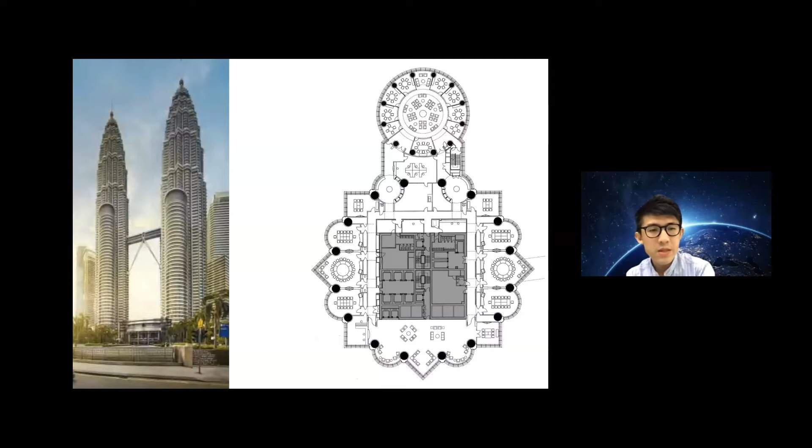And we are attracted to things like these, which are, to me, dangerous. We put up monuments to signify this sense of progress, this aspirational nature of humanity. But we forget that these remain containers merely for buildings that may be dysfunctional. In this case, KLCC is a great example of a building designed to look like something, but that operates poorly as an office. So as a practice, we're more interested in exploring these other spaces beyond what things look like, but perhaps how things feel like, how things work, and how things behave. That's the container, the filter, and also the lens with which we look at the world around us. We prefer to stay away from form.

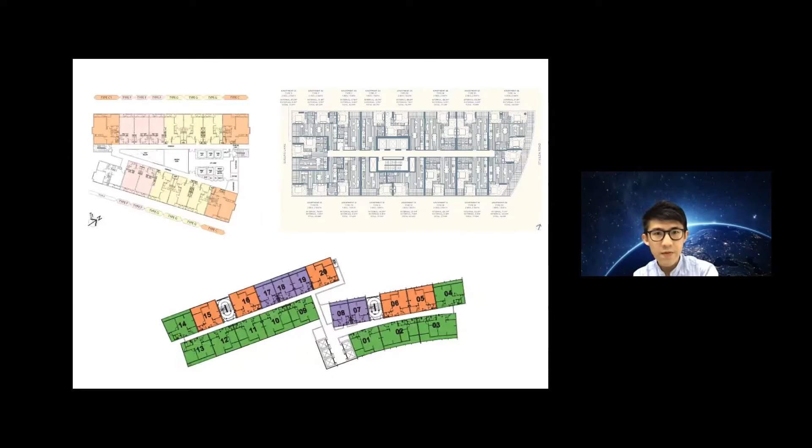We think more in conditions, environments, and situations. This is a very interesting slide that I've used in all my lectures. I won't tell you which one, but one of these buildings is in KL. The rest, one is in Melbourne, another in Milan.

But when you look at them, the floor plans all look the same. We feel we live in this kind of situation right now as humanity, where this is a representation of an apartment unit with a bit of living area, a bit of toilet, a bit of laundry, a bit of kitchen, a bit of bedroom or bedrooms. We're given bento boxes, and as architects, we design bento boxes, which is a bit of everything but actually quite boring. Even if you have this every day, it's not exciting. Even though we package it in different shapes, we are still creating bento boxes all around.

As a practice, we have queried that. We understand the drivers for these bento boxes: they are commercially lucrative, and developers love repetition. The problem is that the market, or people in general, are then educated into liking bento boxes. So we design bento floor plans, and further to that, towers of bento boxes, which are then replicated and distributed throughout our city. That is the position I feel we as a practice have sort of entered into.

I guess the question is, as architects, what kind of position do we take as practitioners, as thinkers? Do we perpetuate this form of thinking and the making of our cities, buildings, and built environments, or do we begin to take a more political stance so that our buildings become a position against or for a certain thing?

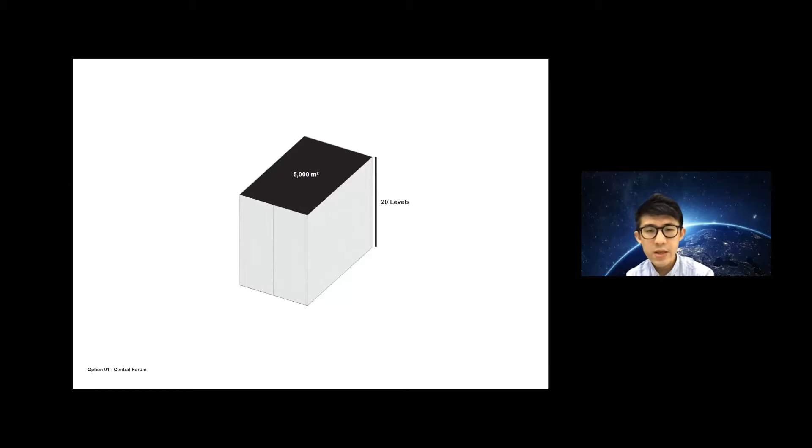This was a project we were invited in competition to work on in Port Moresby, Papua New Guinea, if you're familiar. It's a really strange place with very little context or built context. We were asked to put a really large office tower in the middle of nowhere. The client wanted a really large footprint and a fairly squat building. Our argument was that the deep footprint would make the building so deep that sunlight or natural light would not be able to get in.

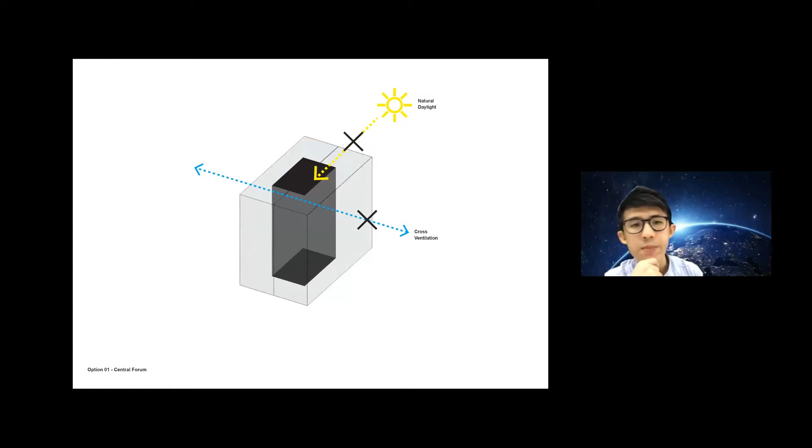So we proposed 2 buildings instead of 1, which they rejected. Further to that, we said, hey, why not bring the 2 together? Obviously it looks complicated, but it's a simple move. What this does is open up my first point, which is to open up new grounds. So our idea of a building sitting on a particular site or ground is then augmented in this situation where new ground planes are set up.

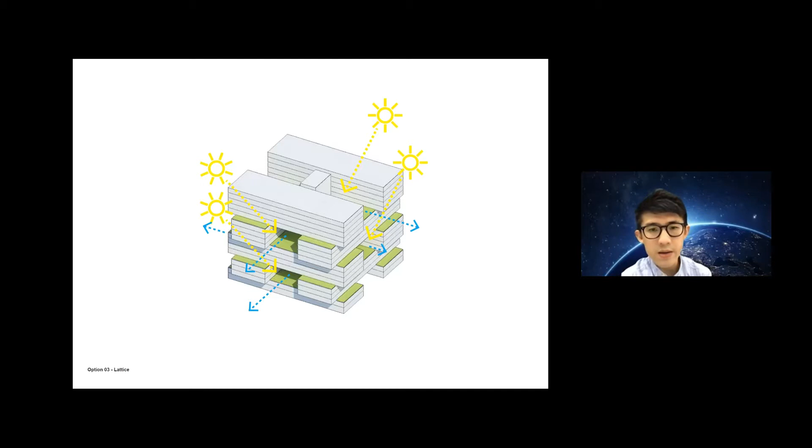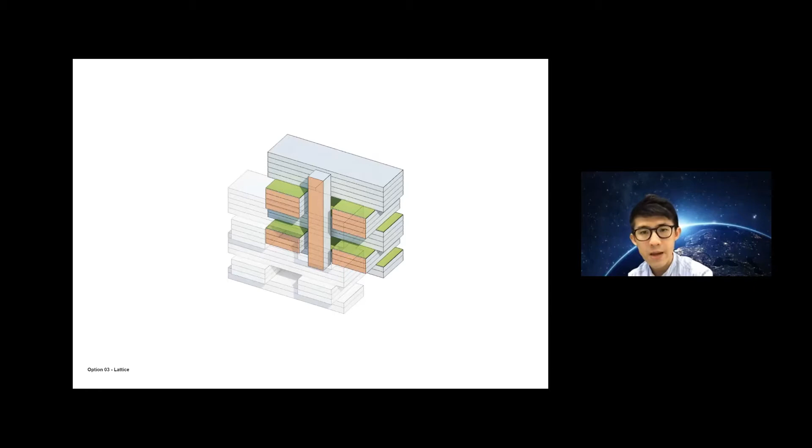Rather than thinking of this building as 20 stories, they are now stacks of 5 stories. What this does is set up a really interesting situation where the outdoors is immediately against the indoors. It also questions this idea of how we work - especially now, though this was done a good 5-6 years ago - in the era of the pandemic and post-pandemic, the question of how we work is front and center of the discourse. So this proposes another way of thinking where the building is now a community through the way it's stacked.

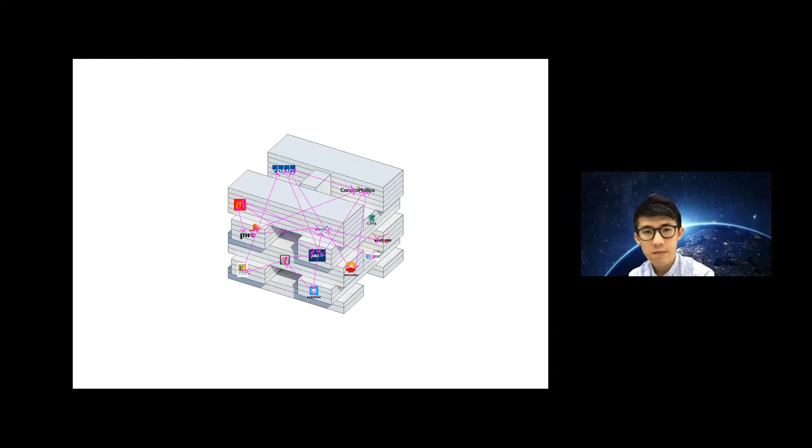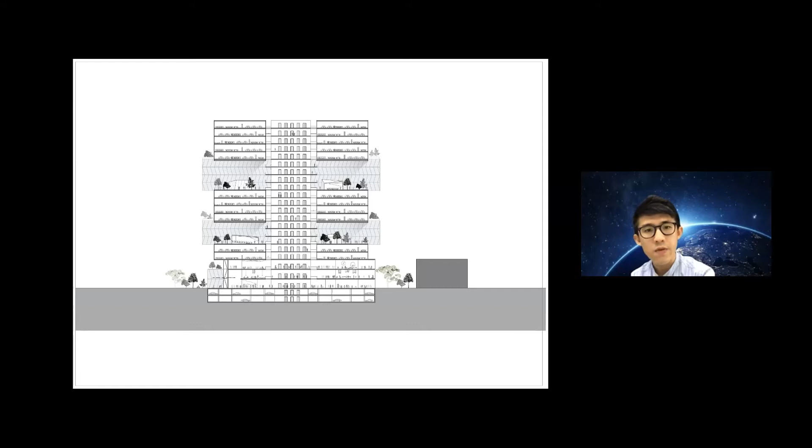You can see the floor plates are highly efficient and hyper rational, but in a simple move, in an attempt to create these new ground planes, a new typology is formed. This is how the building stacks up. Again, we're not so interested in the end result as we are in the series of ideas that it addresses.

And this idea we've also looked at for a slightly different format.

Sorry, I hear hissing in the background. Is that just me? Okay, I think it's gone now.

This is another project we worked on in Phnom Penh, a new headquarters for one of our clients. Phnom Penh is a great and amazing city. The same way as Ho Chi Minh is, it's sort of the life on the street, its vibrancy and energy is second to none. Very unlike KL, where we are really concerned about the sun and escape into our shopping malls. People spend a lot of time on the streets.

So we wanted to capture that idea of pulling and creating new ground planes further up the building, pulling the street up the building. Again, a very simple move. You can see that none of our moves are complicated. To a large extent, they are highly low tech. We are not interested in overtly complicated maneuvers.

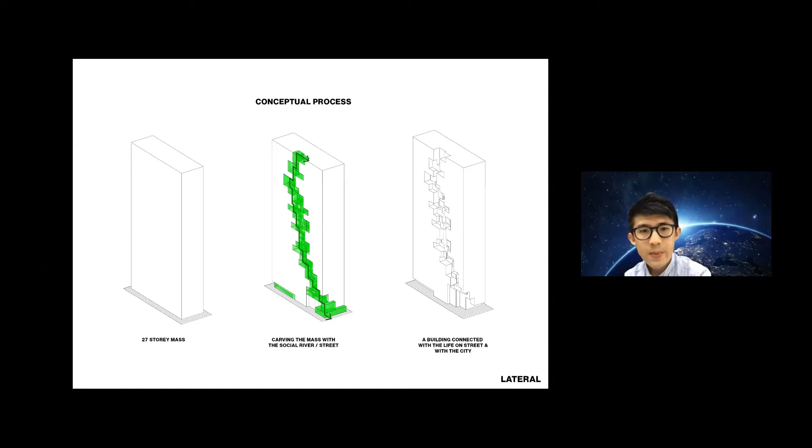What this street does is juxtapose these air-conditioned areas, which we understand are necessary, obviously, as people work in the tropics and need air conditioning, with the idea that all the meeting rooms are semi-naturally ventilated. What if we brought the street up? What if you met in cafes and gardens and garden rooms instead of air-conditioned meeting areas?

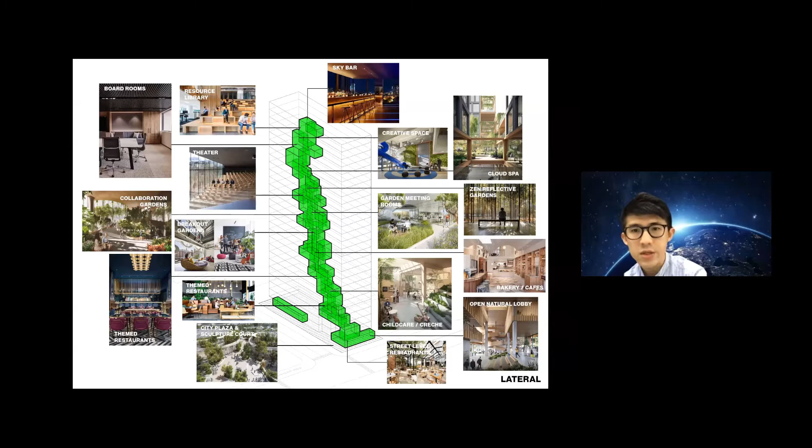And this becomes the third method to navigate the building via this vertical street. And the powerful gesture it makes in itself, the building becomes a critique of every other building in a city.

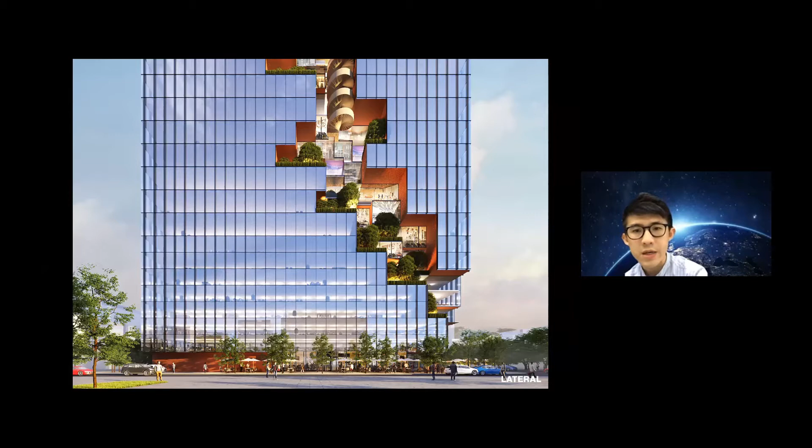All right, let's get on to operation number 2, which is really this idea of, I guess, moving away from the preoccupation of architecture and architects with a building as a container or as the endpoint. We were in this project more interested in the parts that made up the building rather than the building itself. You can see buildings like this lend very little identity and address to each and every user; rather, it's preoccupied with itself as a whole.

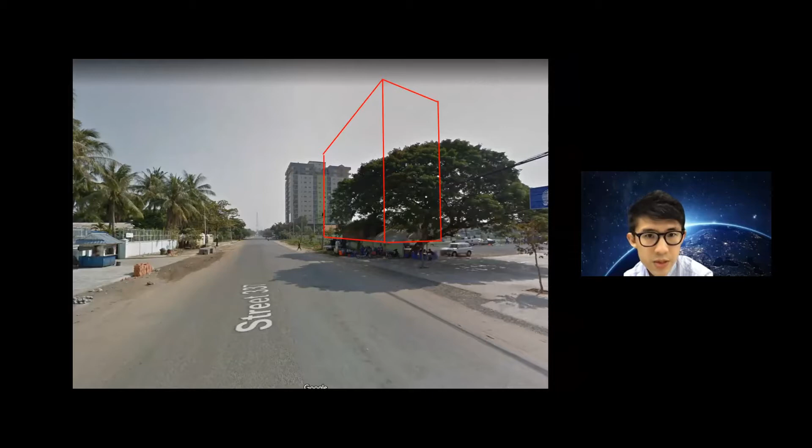This project is again in Cambodia, and it's been built. The client's brief called for a large 15-story tower in a neighborhood full of single-story buildings, except for one building in the distance, which is about 15 stories. So for a fairly low-lying context, our argument with the client was that you've got to be a bit more contextual with how the building sits within the site.

We told the story of this idea of the part, or the home, each home being able to be celebrated on its own, and that the community or the building was a result of bringing these individual homes together. So instead of one big building, we designed 6 small buildings, or 6 small villages and communities, brought around a courtyard. So there's no corridor, no closed corridor in this building. Rather, you enter and arrive home via a courtyard.

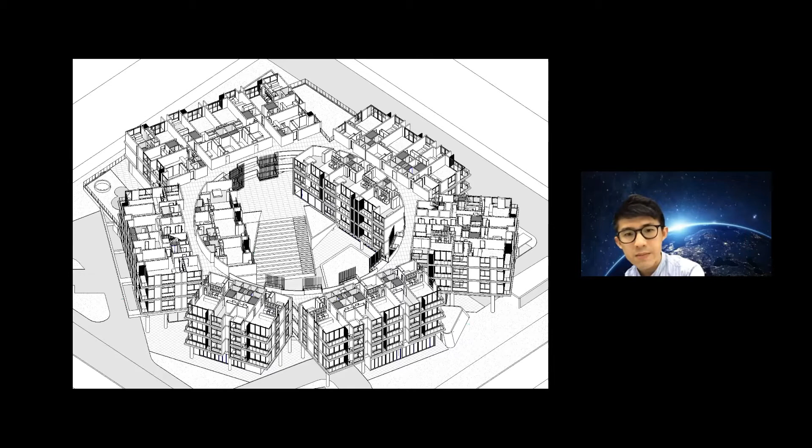This is a really interesting project that we worked on in Melbourne, but it got built in Cambodia. We had to resolve a lot of communication, technology, and buildability matters remotely, which was a very interesting process. We had a fairly interesting client, and the thing is built—it's being fitted out right now.

So it's a strange building that's sort of a sum of its parts, rather than starting from how we wanted it to look. And the best part of the building is actually the little Khmer house that the client added at the last minute on top, which again emphasizes this idea of a hybrid, where the component parts make up the whole.

Another project that has built upon this idea is currently about to start construction in Kuching, in Sarawak. We were fascinated with this typology of a village, where as a whole it looks complex and varied and diverse, connected by this infrastructure of walkways, which are common and public.

What's lovely about this is that the individual houses did not lose their own character. The individual owners had every right to modify, extend, and paint their house in a certain way to preserve a certain address and character of their own. And as a whole, it's highly complex.

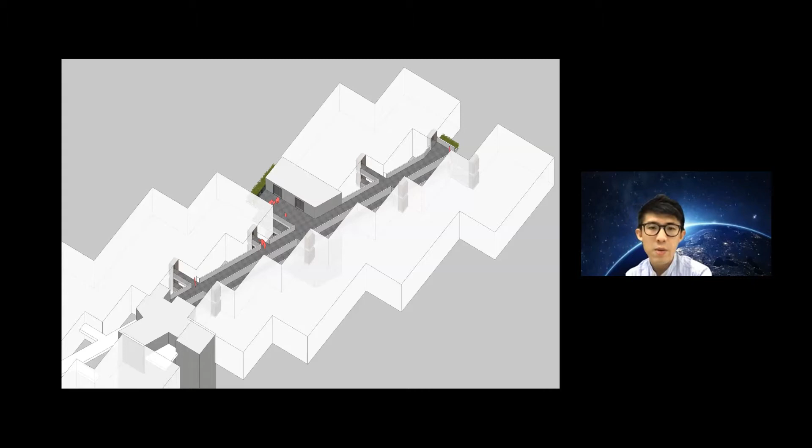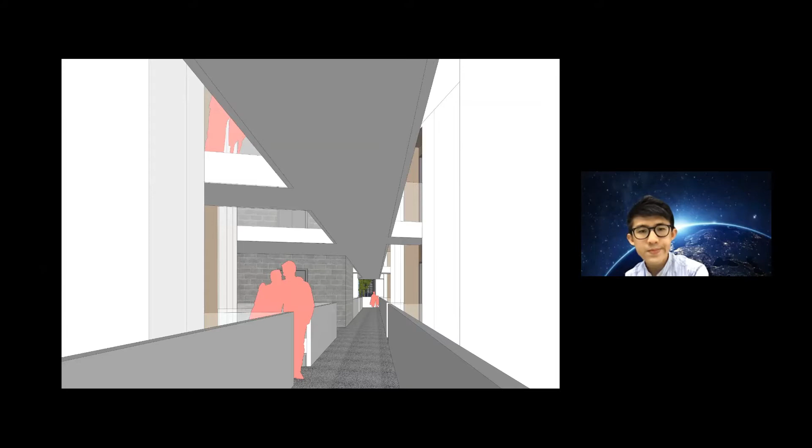As a block or as a unit, they are varied, but then as a whole, they come together in a very complex way. This is another 3D showing the walkways relative to the unit. You really get a sense navigating the building that you're walking along this boardwalk, and then branching off into each unit left and right. And it stacks up as a village connected by these walkways.

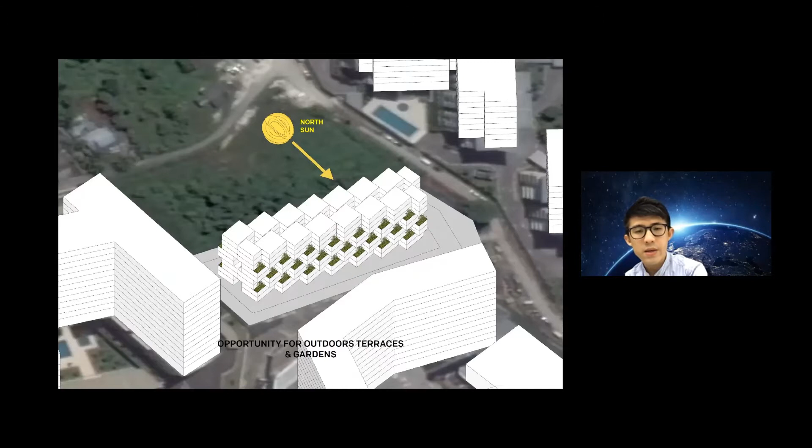This is why the units are articulated. Firstly, to avoid the north sun, and the other to avoid direct overlooking of its neighbors. And so they end up, through a very simple maneuver, finding an end result which is complex.

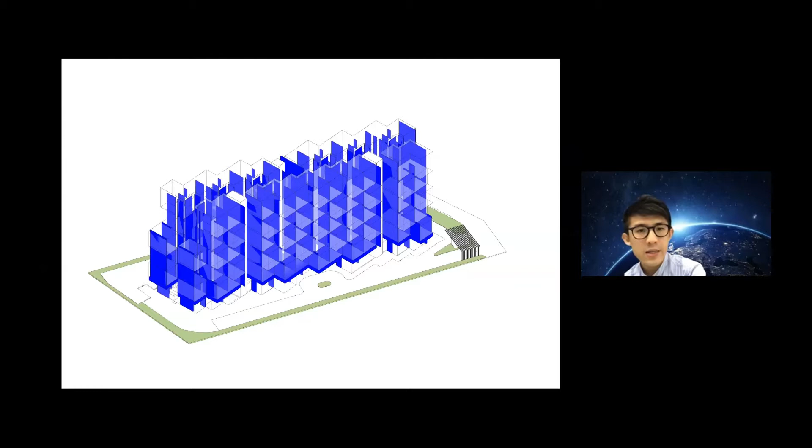So these are little experiments into designing from the other end, where we design the parts and the rules around each part rather than designing the building. The building is a result of rules we've set up at a granular level, just so that you feel it's been resolved. All the structures line up despite its complexity, and you can see that the governing grid is at a diagonal, and it works from the basement all the way up to the top of the building.

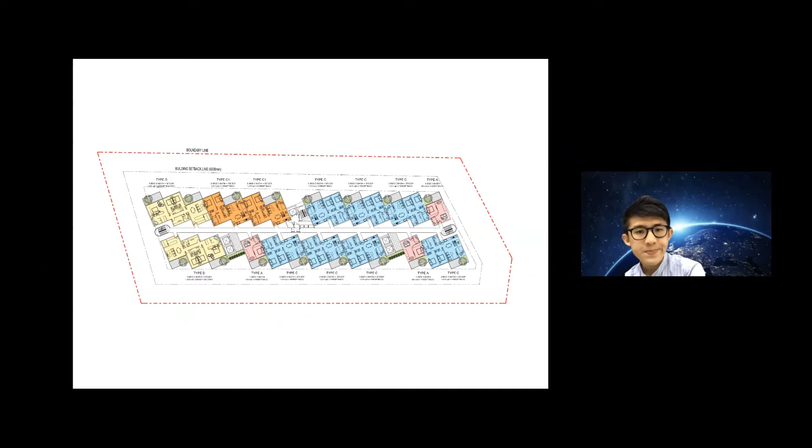And so this is breaking ground later this year in December.

The next project is our critique on the facade, or the end form of buildings around not just KL but around the world — this obsession with iconism and representation. You can see this is a slide I show a lot in my lectures: this obsession with being able to see KLCC from every project, even though they are 20 kilometers away and KLCC is not visible. We, as Malaysians, or at least as Klang Valley people, have this obsession, which is deeply strange.

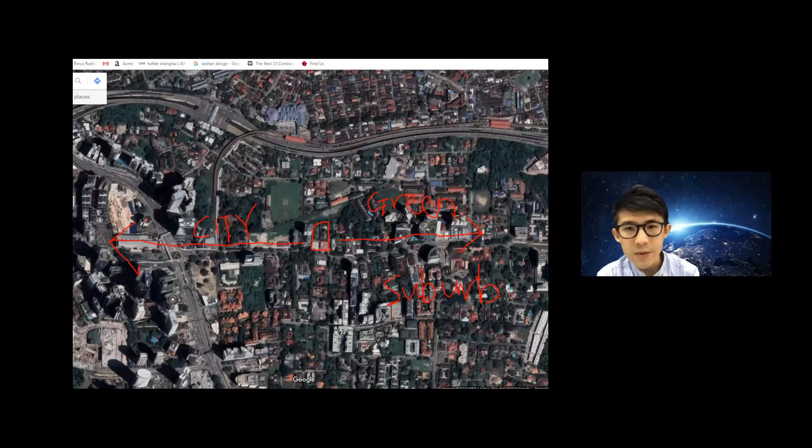We took a piss with this project. We instead say that, look, it's not so important — our building is more important than KLCC. So it sits on a really interesting site on Jalan Ampang. It's very close to KLCC actually, but it sits at this point of transition between what we understand as a golden triangle, or the city proper, and the suburb, or Ampang itself, which is a lot greener, a lot low-lying.

The building is very skinny, so it's very good for solar orientation, obviously. But in articulating the facade, there was this attempt to face the city, literally, but also face the parklands, or the lower lying parts of Jalan Ampang, as a move. That is then further accentuated by introducing meeting rooms on the facade, which further allow the building to step down towards the street.

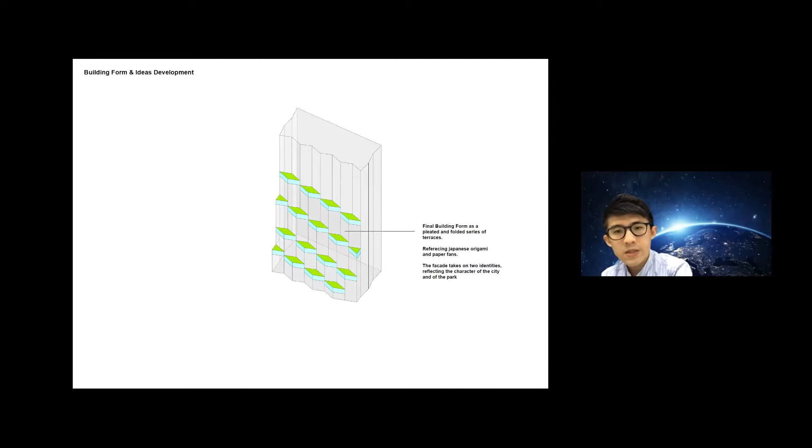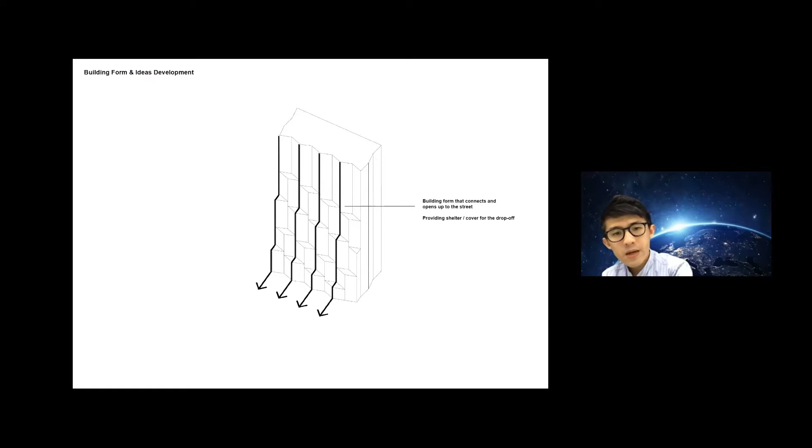So the facade was not trying to look like something, but rather the facade, in its attempt to address its tension between the city and the suburb, became something of its own.

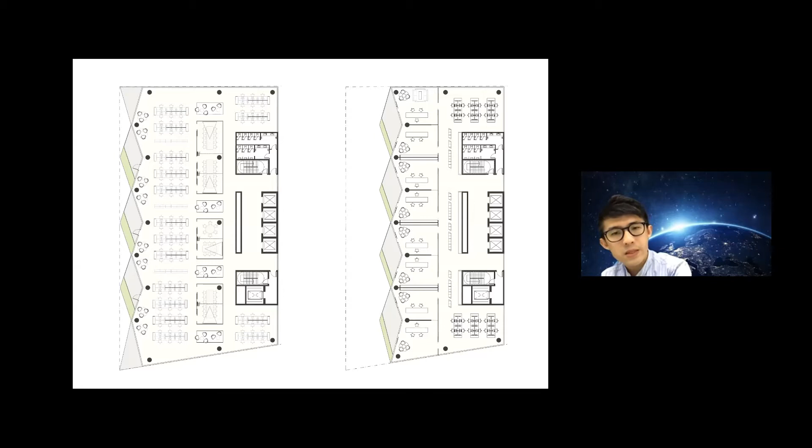So when you arrive from either side, there was an attempt of the building to address it, quite literally. And it's in that folding of the skin that we have inserted meeting and usable space. So the facade becomes this living and deep skin, and obviously serves its performative properties, and it allowed then the added bonus of terraces outdoors.

The next project is our preoccupation for making spaces and creating gaps within the building. We work on a lot of service apartments and highly dense buildings in the city and in the fringes of the city. There is really little room working on these projects to create any third space because of its highly repetitive nature, and obviously cost comes into that when you are talking repetition.

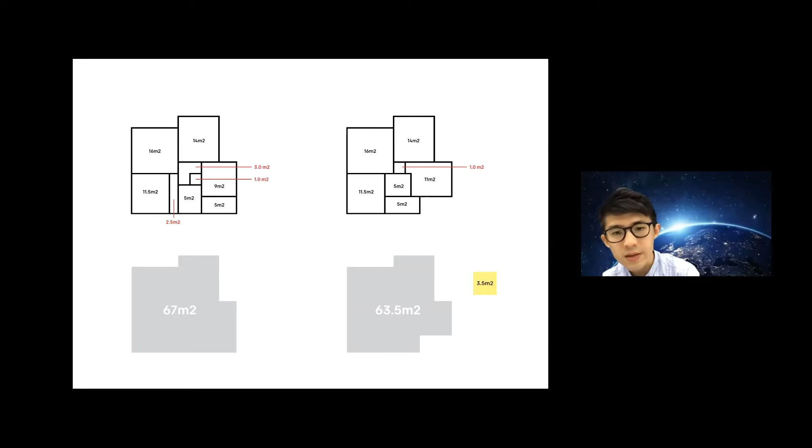So what we tried to do in this particular project was to convince the developer to say, hey, instead of creating a whole bunch of small spaces in each unit, why not extract a small space — in this case the laundry. We argued that why do you need a small laundry in a small apartment? So if you save the laundry in one unit, on a floor of 10 units, you save 35 square meters. In a building of 300 units, you save this amount of space.

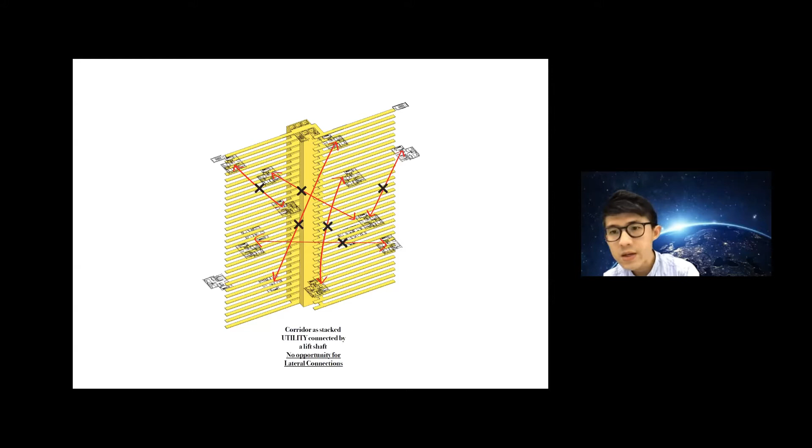Another project, actually this was one of a series of experiments that we did for an exhibition. This was about looking at a corridor as the last domain within high density residential developments. In its current situation, these corridors do not encourage lateral movement because the lift becomes this vertical connector, so the experience of coming home is very mechanical.

You enter a lift, you exit the lift, you walk down your corridor, you enter your unit, not unlike hamsters. So we proposed instead that all the levels be linked together via a spiral, assisted by the lift, but it's possible to walk up the entire building or even cycle up. It's at a gradient that you can cycle or even go up in a wheelchair if you have strong arms. Then the amenities are a series of steps stacked together, ultimately creating a building that is both efficient but also maneuvered and experienced in a very different way.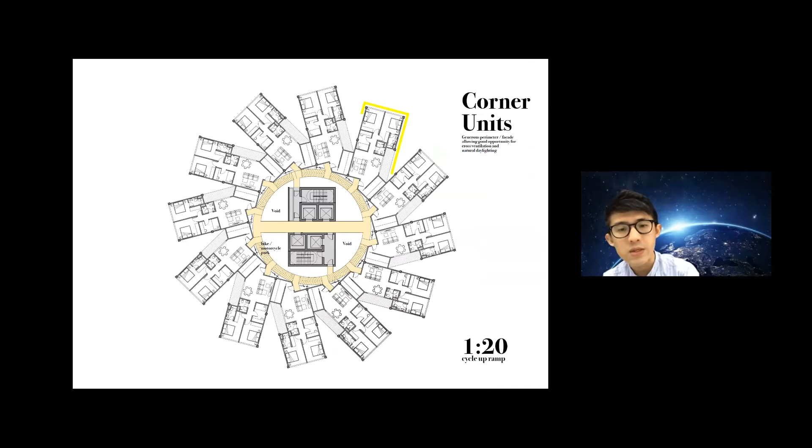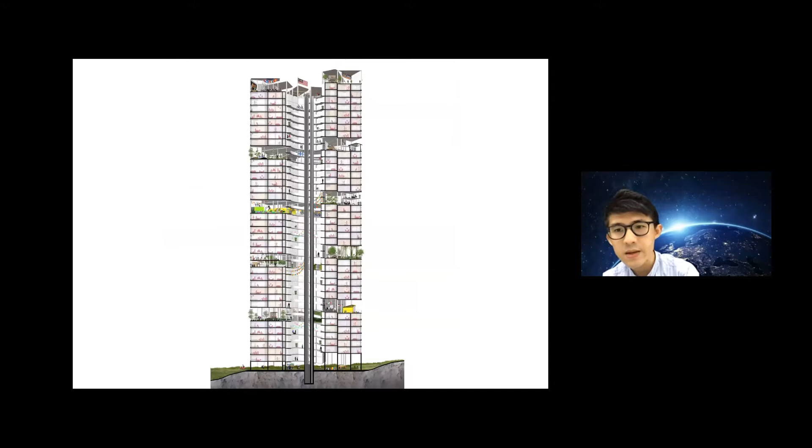It's actually a very efficient floor plan because the circulation and the geometry of the circle results in a very compact core, but also, on the fringes, on the outer facade, a very large facade. We had to print this out to verify its feasibility. Of course, this was never built, but again, it presents another way of thinking about high rises in the city.

This one is Hammond House, and this is one of our preoccupations in designing a building which sits within a city: how to bring the city in. How does the building touch the ground? How does the building expand its presence? Not through the way it looks, but through the way we design it. How do we bring a part of the city into the building, and how do we expand the presence of the building into the city?

The site is extremely tight. It's a small bungalow lot on the corner of two roads, about 11,000 square feet, if that makes any sense to all of you. The wonderful thing is that diagonally opposite are two amazing century-old rain trees, and we wanted to bring that in. So we cut the bottom of the building.

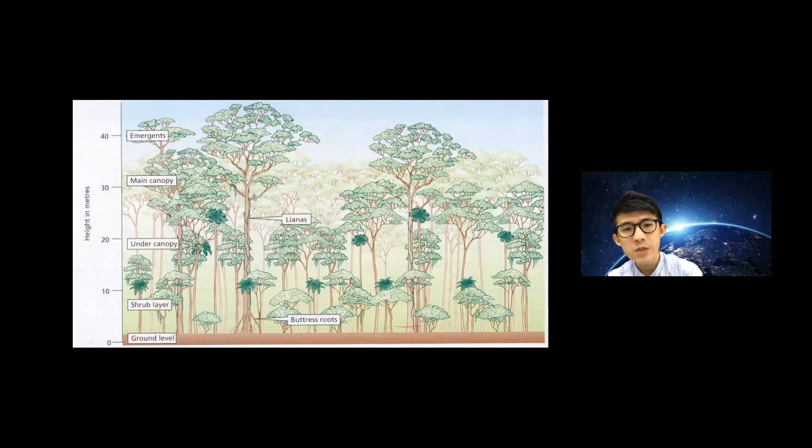These are a series of operations on form and on mass, and as a result, form is generated. In this case, lifting up the corner at the ground so that the site expands across the street, and then further cuts up the building to address certain urban aspects, reinserting urban scaled spaces up the building.

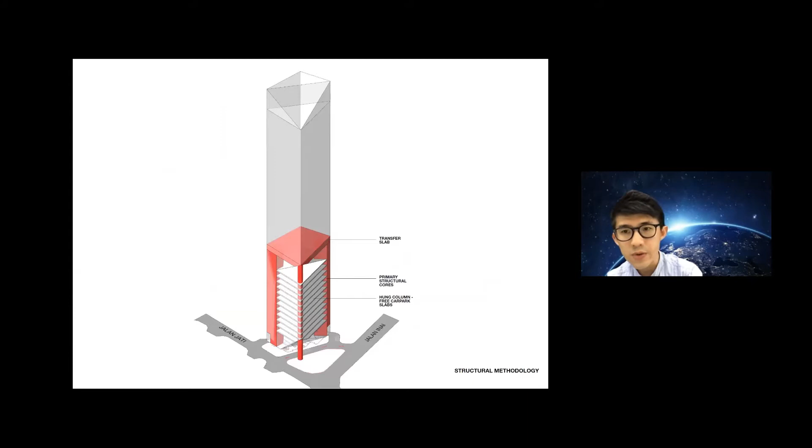We won this project not because of the design. We won it because we came up with a workable structural solution, which allowed a very small site to house both a car park and apartments over it. So the whole building is built on 4 columns, which you see in red, and a big table on top of which the shear walls go up for the apartments. It's a very simple move, but a really urban scale move.

So at the ground, the building opens up to bring the street in. At the mid-level, the city comes in, and obviously at the top as well. The building is under construction. We are expecting to see it completed at the end of next year.

We are preoccupied with stairs, as we are with corridors. We again feel that in a high density, highly repetitive building, the stair and the corridor is the last opportunity to create an interesting thing.

This is a project that's about to be approved in Kuching, again my hometown. The building is a result of its planning parameters, so we did not design a form—the planning parameters designed the building for us, which is kind of good. We got the design for free. The building is really simple: it's a C shape with an open core at the back.

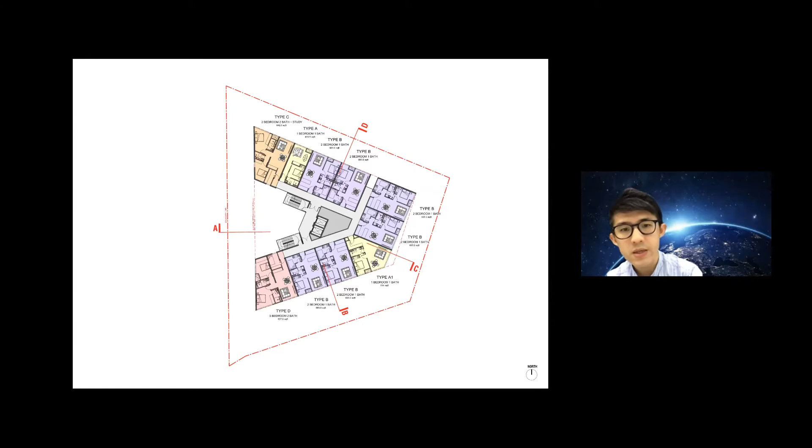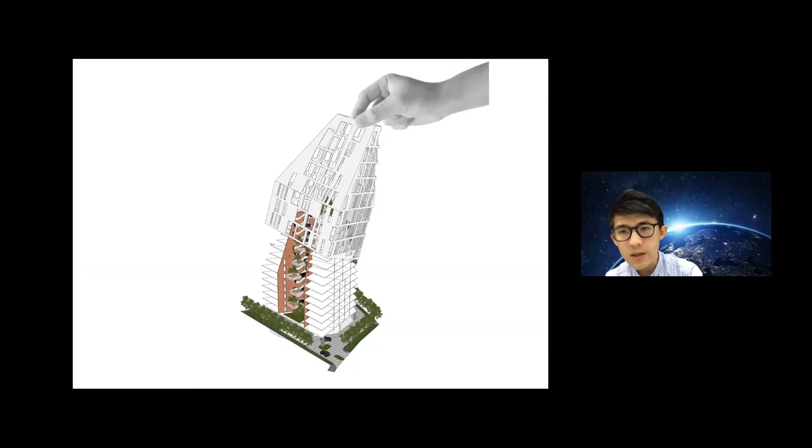So what we tried to do here was use the fire stairs as an opportunity to connect all the floors and create new opportunities for the community to meet and gather. This is just an interesting unfolding of the skin. The back part of the building becomes these sort of platforms, forming amenities and shared spaces—anything from a library to a yoga deck to a gym—all housed in this vertical stair slash vertical street.

So the stair goes beyond being a stair. It becomes a communal device.

This is for our little studio in Melbourne. So we didn't have any work during that time, so we became our own client.

There was this critique in how does a space expand beyond a space? How can we get 1, 2, 3, 4, 5 lives out of one footprint? How do we get 300 square meters out of 50 square meters? How do we bend time and space through thinking about density? We learn a lot from obviously Hong Kong and all the micro living arrangements that people live in.

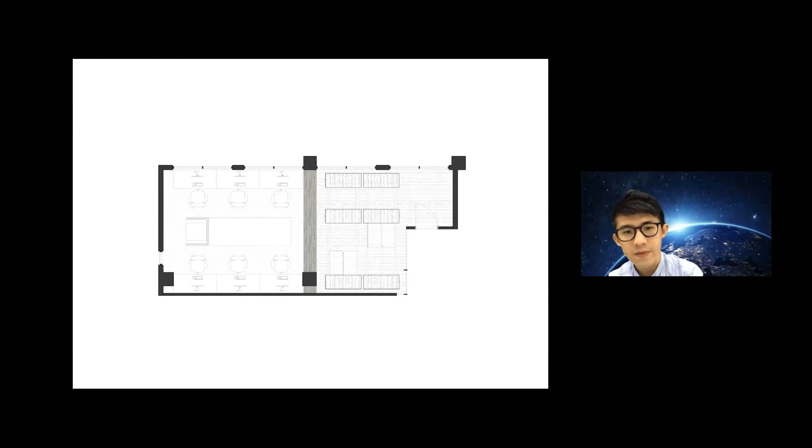It's a tiny space of about 35 square meters. On one side, we have the proper workspace. On the right-hand side, we have basically a very simple idea of shifting walls or shifting bookcases, which are movable and adaptable. But this is sort of a critique again on this idea of the permanency of architecture.

Can we, through its double life or triple life, expand its utility as well as its sustainability? So if you could get 3 functions out of one building, it's technically 3 times more sustainable. So in this case, it can be used as an office, as a workshop, as a ping pong arena, as a sweatshop, a party, an exhibition, and so on and so forth.

The next operation is looking at structure. I mean, the way we think in the office, again, form is not the agenda. We are always keen to look at how a single line can be both form, it can be structure, it can deal with cost, it can deal with utility, it can deal with ultimately also how the space feels like.

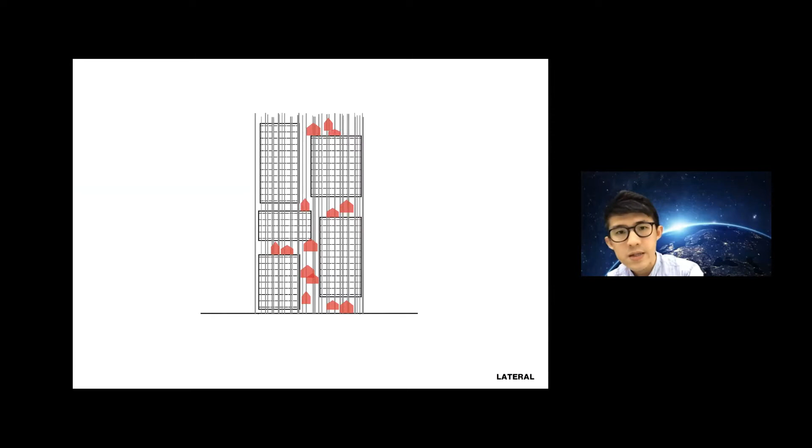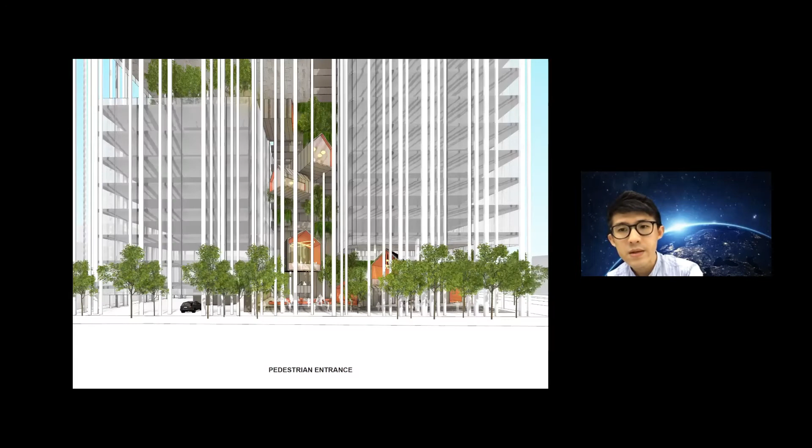So in this case, this is for a little project in Phnom Penh, an office building, where I guess we took a bit of inspiration from the forest. And what if instead of thinking of structure as being on a Cartesian grid, what if the structure is the architecture, is the idea, is the sun shading device and the screen? So in a way, the structural engineers were the designers, and all we did was put it together.

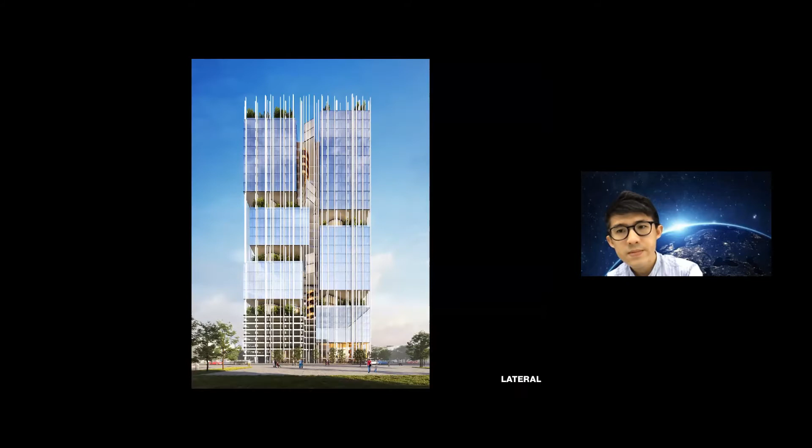How am I doing for time? Am I still okay? You're actually ahead of time, at 7 minutes. Okay, I'll quickly breeze through it because I've got quite a few slides.

This was for an exhibition, a small little exhibition we did with, I think it was KLAF, a few years ago. Again, it was our critique on the state of our housing in our country. We've moved from this state, which is our kampong, where 10% of, if you like, space is private, and 90% is common or open, to a situation like a longhouse.

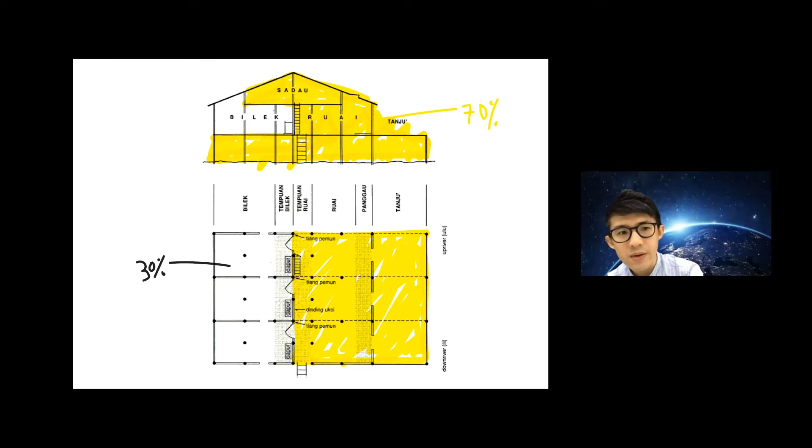Labat, you'd probably be quite familiar with this, where 70% is common and communal and 30% is private, the bilik. To this situation now, which is where we're in, at least in the Klang Valley, where 70% of our floor plan is private and 30% is common, and again, the corridor.

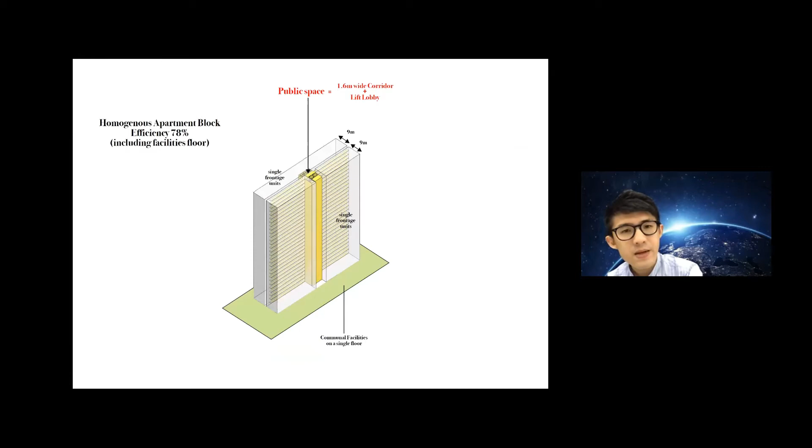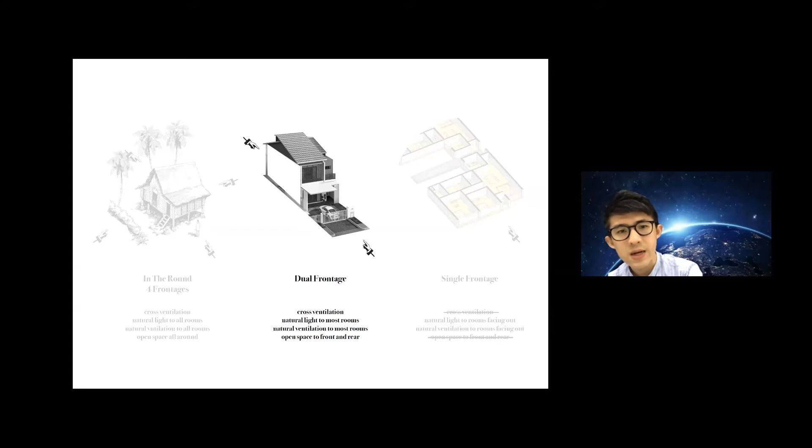So we wanted to look at the possibility of introducing dual frontage terrace houses in the sky, where we open up the plan and activate the corridors. So we put corridors on every 2 floors instead. And in doing so, we were able to bring the width comprising of 2 corridors together, which allowed us then to use it as something beyond a corridor.

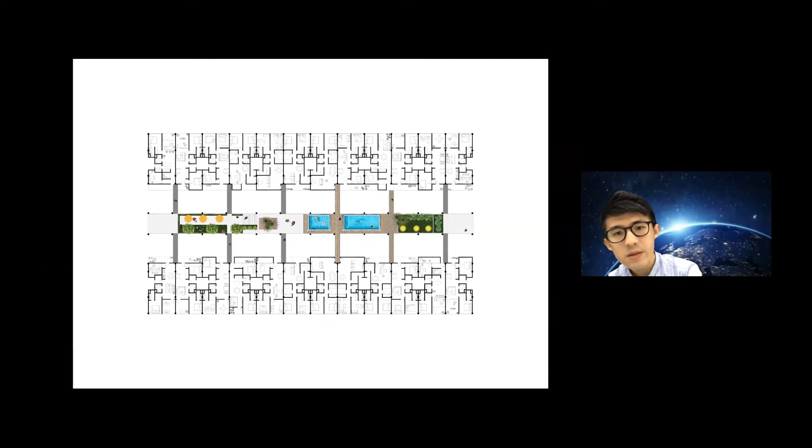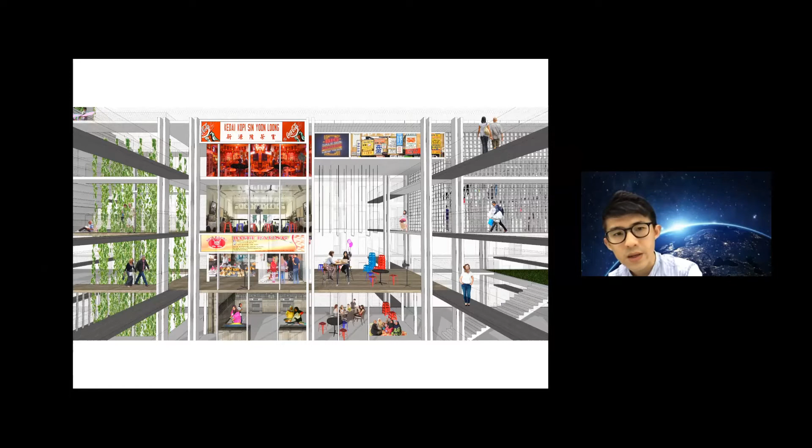So again, a really simple idea. Again, a speculative one, but perhaps asking the right questions. Setting up a situation where the corridor becomes a domain on its own, rather than just serving the utility of getting from A to B. And the corridor was widened and thickened to a point where it can begin to accommodate communal activities.

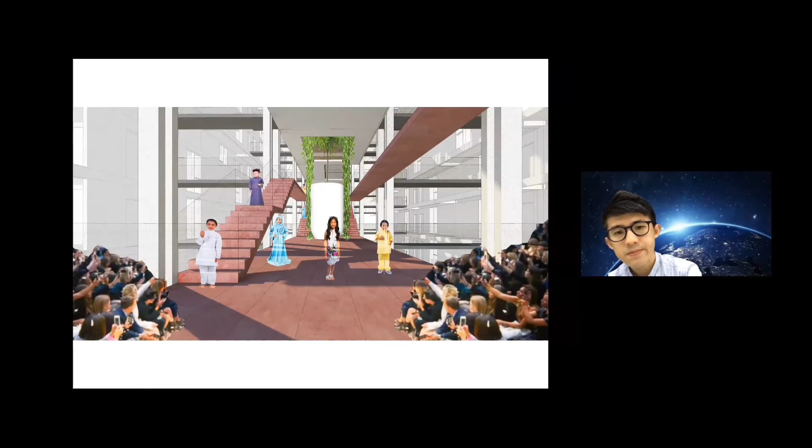And the next project is one which is a master plan. And this operation was about, and this is something we do a fair bit in the office, and perhaps something that you can consider, or a process or discipline that you can consider in your respective design journeys, which is to not start at the start, which is to start in the middle. In our case, we were asked to do a large master plan.

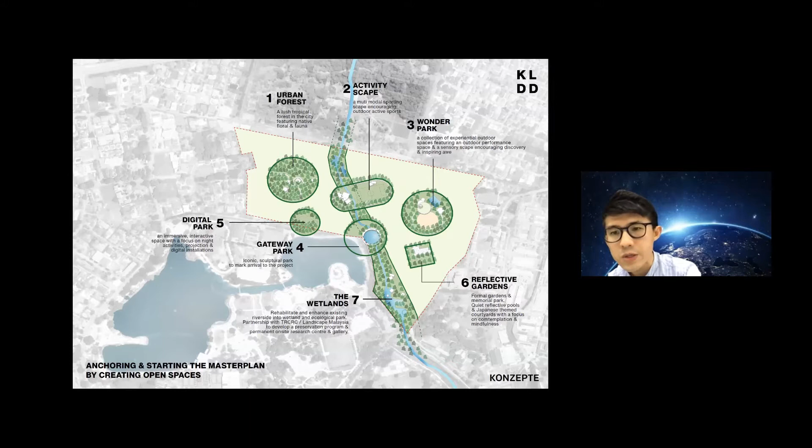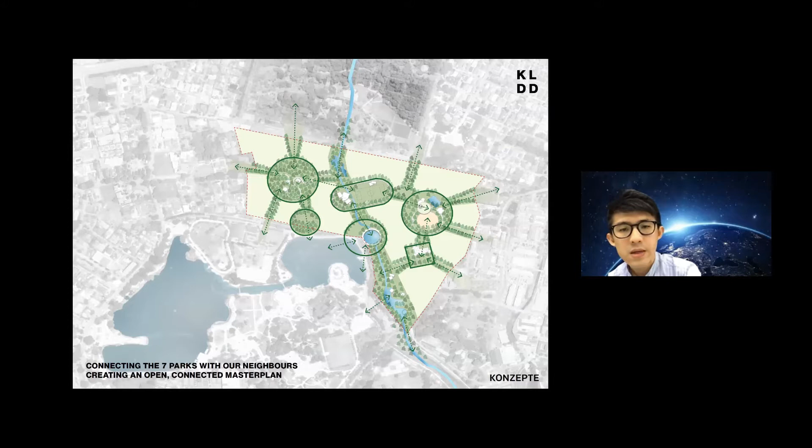But instead of starting with roads and obviously buildings, we were more interested in open space. So we started with open space. And the open space being the center of everything, rather than the building or the buildings being the center of everything. And connecting the open space, and ultimately then bringing the buildings around these open spaces. So a master plan that was designed from the middle outwards rather than from the start.

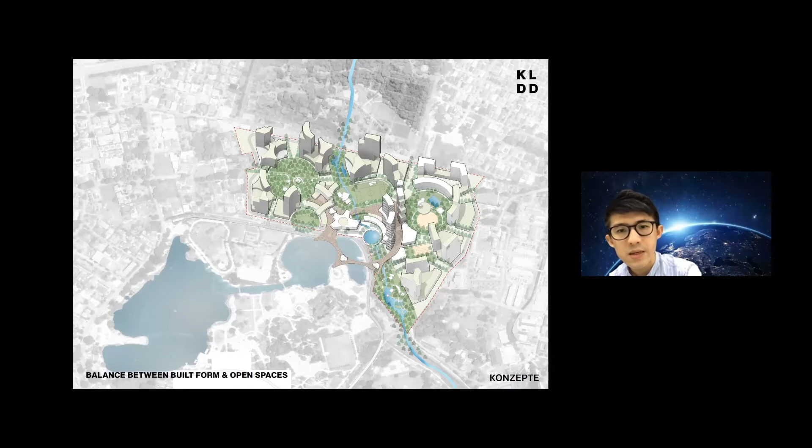Again, this one was a competition we didn't win. But we use a lot of these competitions in our office to explore ideas, to critique existing ideas, and as a point of reflection for us.

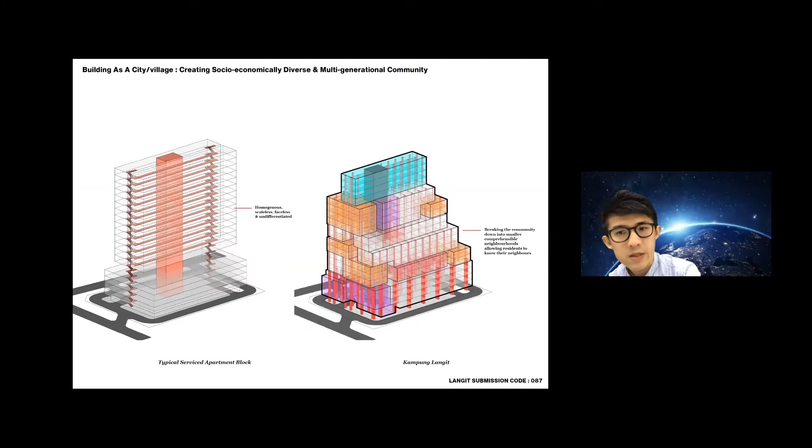In this particular one, we were called to design a small building for service apartments. We were very interested to explore the design as a democratic act or exercise, which involved the community rather than us as designers playing God and designing for people, but design as a participatory act or process involving the end user.

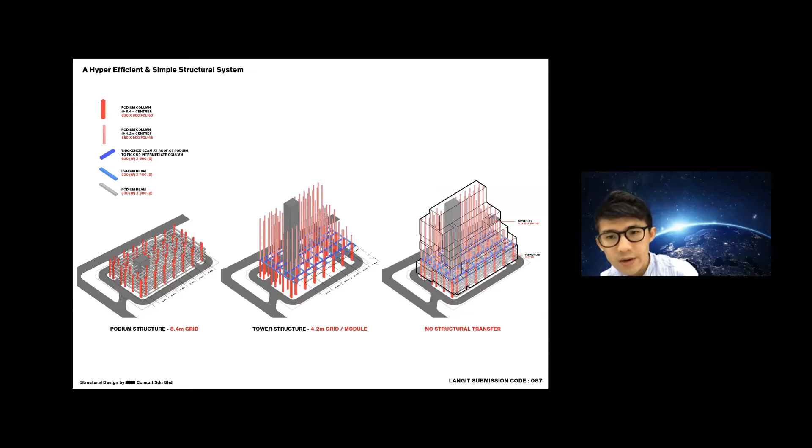So we worked very hard to develop a modular grid. But more interestingly, it was about going, how do we design the unit or the module as simple as possible, and then empower our buyers or users to begin to modify the units.

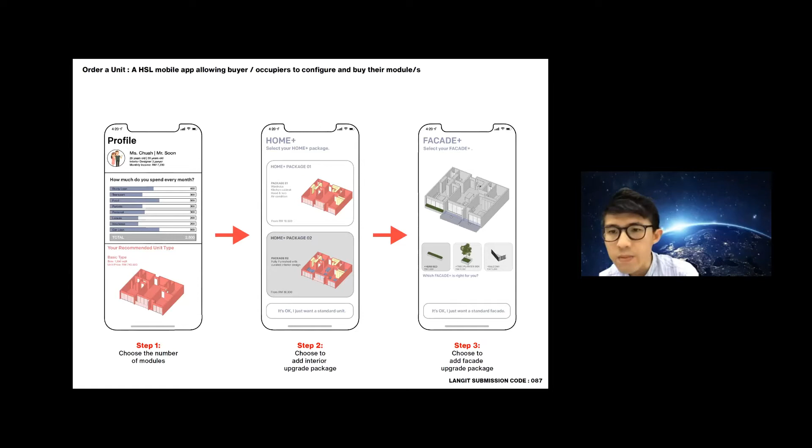So in this case, we look at the different profiles of possible buyers, from the individual to families to extended families. We allowed them ways of engaging the design process through being able to order your home via an app and join the design process. So the design becomes this outcome of the architect and the user, rather than the architect's hand alone and the developer's hand.

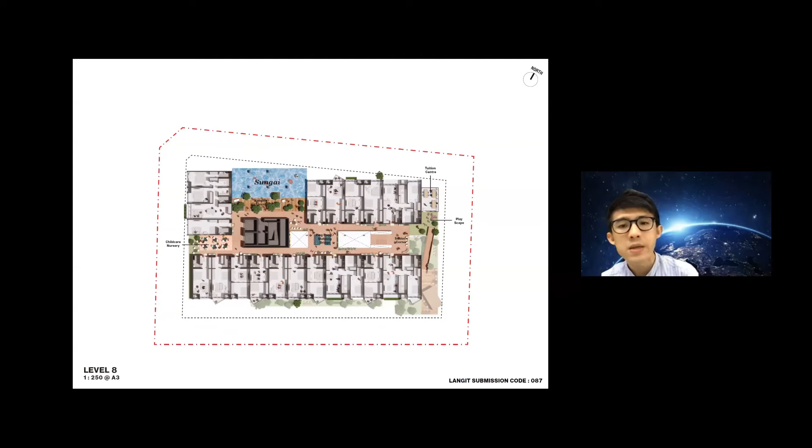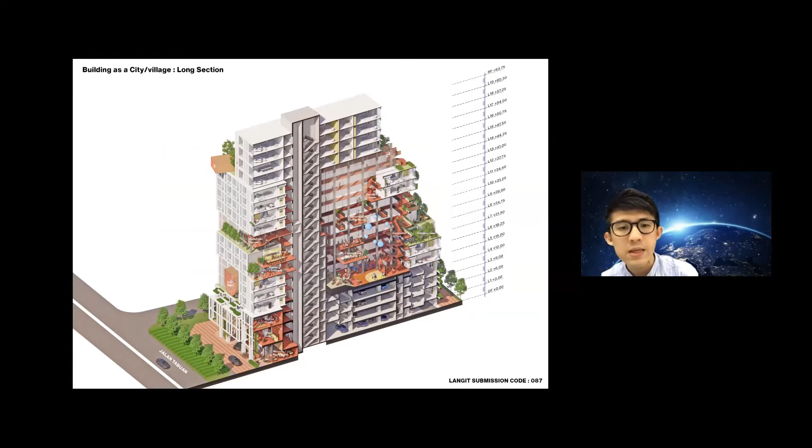But it also, obviously, has to meet all structural requirements, cost requirements, and such. So it becomes this community which is highly diverse, not because of our own hand, but rather because of the complexity added by involving the actual people who live here and buy here.

So it's kind of this mountain or village comprising of different design decisions by different people. And you can see why we did not win it, because it's not sexy.

I think this is my last project. Very quickly, I'll take you through it. This is a project we won three years ago for the Vietnamese Museum in Melbourne.

It's quite strange. We were asked to design it—designing a building in Melbourne for the Vietnamese community. I found that quite amusing. But I think we won it with these three words.

We told the client that we did not want to design a white box with things hanging on walls. Instead, we wanted people to experience the journey that the Vietnamese boat people took from Vietnam to Australia, literally by walking the story instead of looking at the story on the wall.

So in summary, this is a journey. You leave Vietnam because of the war. You jump onto a boat where you were attacked. Many people lost their lives at sea.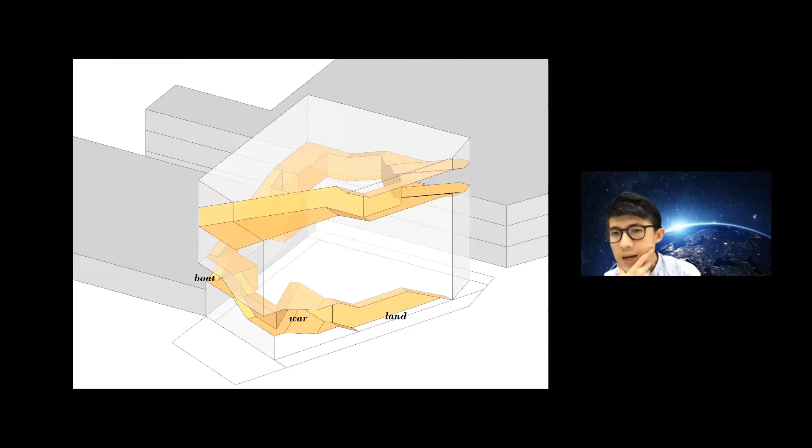So instead of designing the building, we designed the journey first. The building was simply a thing that the journey intersected with. And obviously then the columns, the lift core, and all these other things come in.

These were the series of diagrams that won us the competition, but the building itself is the experience. So you walk through the story rather than see the story on just walls.

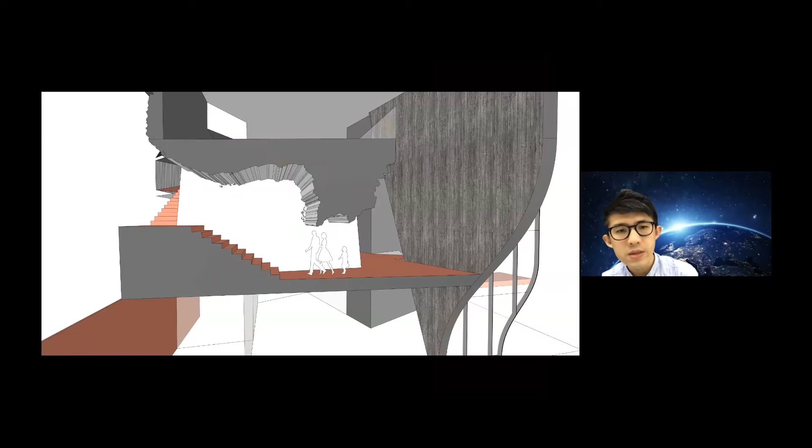Highly compressed spaces to evoke the physical dimensions of sitting in a boat and squatting in a boat, and the apertures that you would get when sitting in the hull of a ship, to the point of new hope, where things open up and they look over the new land that they've arrived at.

So we're just about to get planning approval for this, which is very exciting for us. And the state has committed half its construction budget, so we hope to break ground next year.

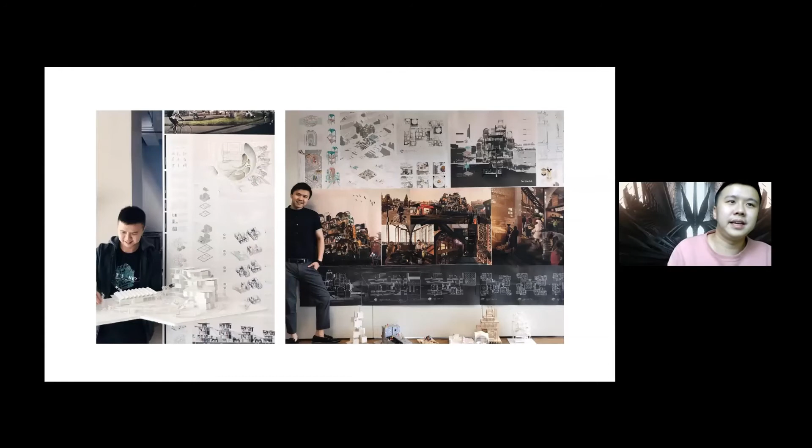So I had my bachelor's degree in UCSI and then master's in University of Sheffield. Last year I just graduated, and apparently it's not a good year because, as we all know, I graduated at the peak of the pandemic outbreak, and then I decided to come back, and then Malaysia became the peak too. It's around - it's not last year, is it last year? Last year around June that time, and I was like, GG, came back at the wrong timing.

I first thought it was a good move to come back at that time, but apparently it's not. When I came back, I started sending out applications - I did send some resumes back in the UK because I wanted a job there, since I really love their weather even though their food is not really good. But I still wanted to try my luck. That didn't work out, so I came back and started sending out a lot of applications while in quarantine - not a lot, maybe like 20-ish. Some of them replied, some just said it's not a good timing. I was like, oh crap, a master's graduate can't get a job, so how am I going to pay off all the debt?

Then someone just sent me a screenshot of Hong Yi actually recruiting a team. I was like, okay, I'm just gonna try my luck. I sent in my resume and said I really love her stuff - I do really love her stuff, to be honest. I tried my luck because I didn't think my stuff was artistic enough, since she's already a super internationally famous, successful, and really artistic artist. So I didn't think I was on that level to assist her, at least. But I did it anyway, and thank goodness she decided to take me in.

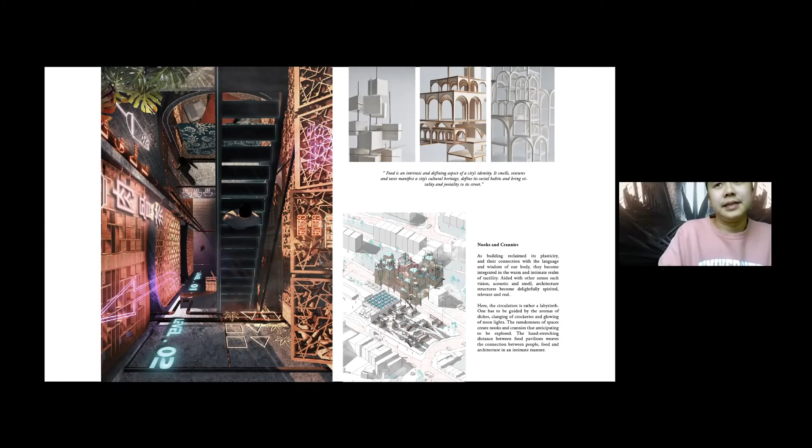So apparently it's a kind of food hall. I really like to insert some of my own interpretation of how the space would be, but it's still really organic space that's customizable by the locals. I really like the site because it reminds me a lot of Malaysia, because it's multicultural and multi-ethnic.

The way we present is also really different, because I always thought presentation was just putting out a slide and talking. But I realized presentation could be done differently, like a comic. You can use a comic to show your space, or use a story, a narrative to show your space, to talk about how a person feels in your space and how activity could happen in the space you design.

So apparently that's that. For my final year, I did a joint thesis project. There's two people, me and my friend Vicky. It's a joint project where we did this energy proposal.

It started out really random. We had a studio trip, traveling from Sheffield, kind of the north side of UK, England, all the way up to the northern part of Scotland. We traveled in a minivan that we built out ourselves.

Throughout the journey we realized we wanted to talk about sustainability. This topic is so widely discussed, and some effort has been done, like Greta Thunberg voicing it out, but most of the time people don't really take much effort. So we wanted to use this design thesis to imagine a world where we bring sustainability to another level.

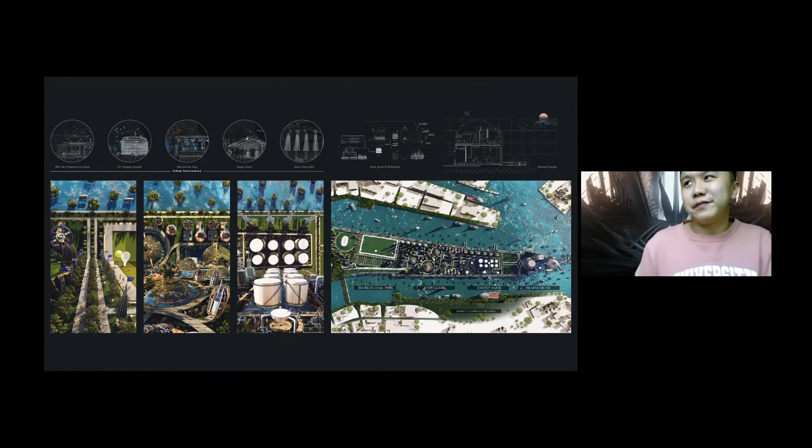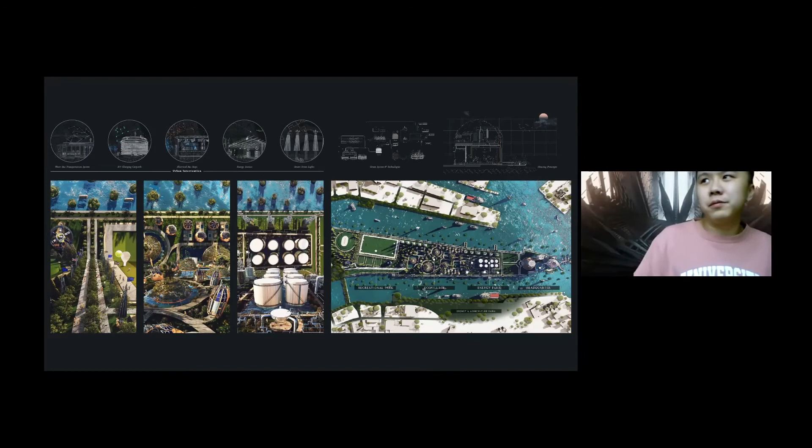We envisioned kind of really crazy ideas, and our hypothesis was actually based on using a blockchain system, like Bitcoin. It sounds very sketchy, but it's a speculative project, and the whole point was to be really brave and wild and free to imagine the world, because there's not many times you get to do a thesis in your master's - there's only one time. So I wanted to give it all out and do something I probably won't do in the future, or couldn't do in the future.

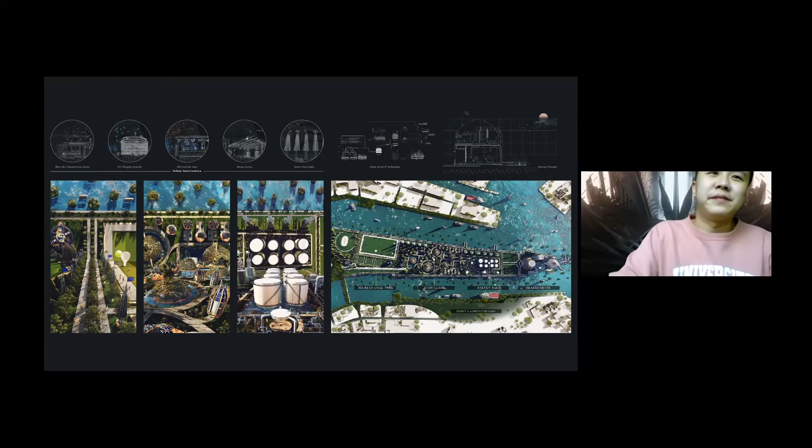Apart from that, we also had to be really technical and solve out the technical side, circulation and all - so it's very technical but still a practical kind of space. This is the energy headquarter, almost like a replacement for banks, and also the... never mind, it's an energy headquarter.

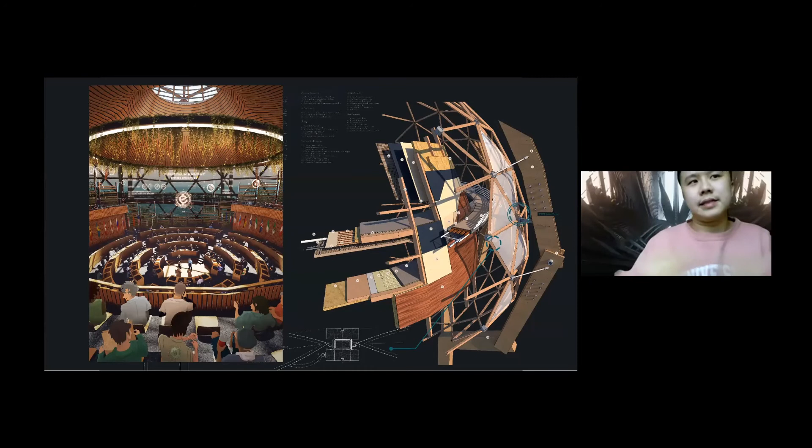Basically, people exchange energy and get educated about energy here. This is the energy parliament, where all the governments come together and discuss how energy could be used or shared. The right side is the really technical side, where we had to do all this tech stuff, but it also gave us more understanding of how a building actually works - you want to be crazy, okay fine, but how it's actually going to be built. That's also very interesting.

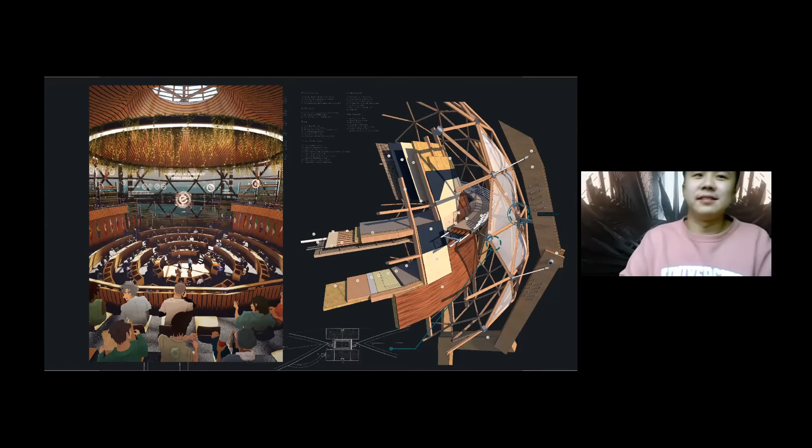We also really liked using cartoon-style or out-of-the-world rendering to show that this isn't reality, but what it could be - to give people a sense of how uncertain this is, so they could imagine it in another way around.

This is the final board. We couldn't print it out physically because of COVID, so we did this presentation digitally.

This is another competition I did, I think early this year if I'm not mistaken. It was for a pandemic solution - how do we live in a pandemic situation. The old existing building is the PPR, and the question was how do we modify it to make it more lively, make it happier to live in during the COVID times.

What I'm trying to show is you can already tell my kind of strength - it sounds very superficial, but I really try to make things look more interesting or beautify things, in a sense.

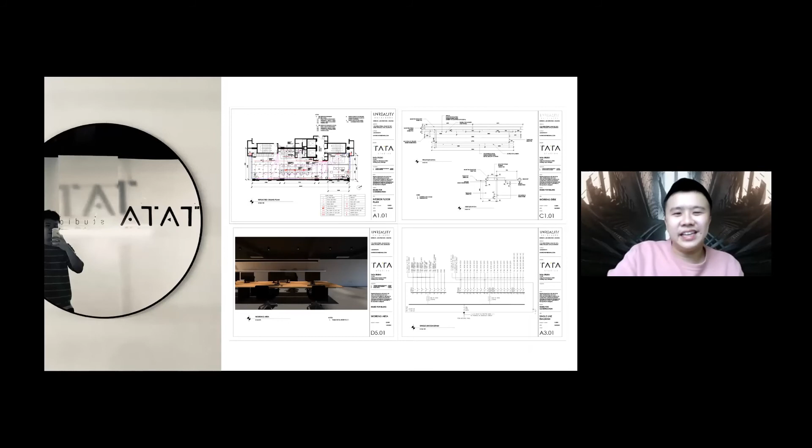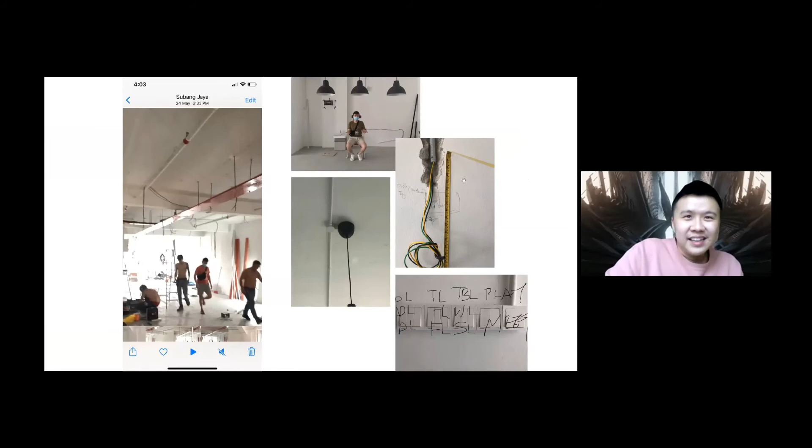It may look like, oh okay, it looks nice and the drawings are all neat, but in real life the construction is freaking crazy. Everyone—it's not exactly shouting, but they talk really rude, and they're swearing and stuff like that. So I have to get used to the environment, but I think I'm coping well.